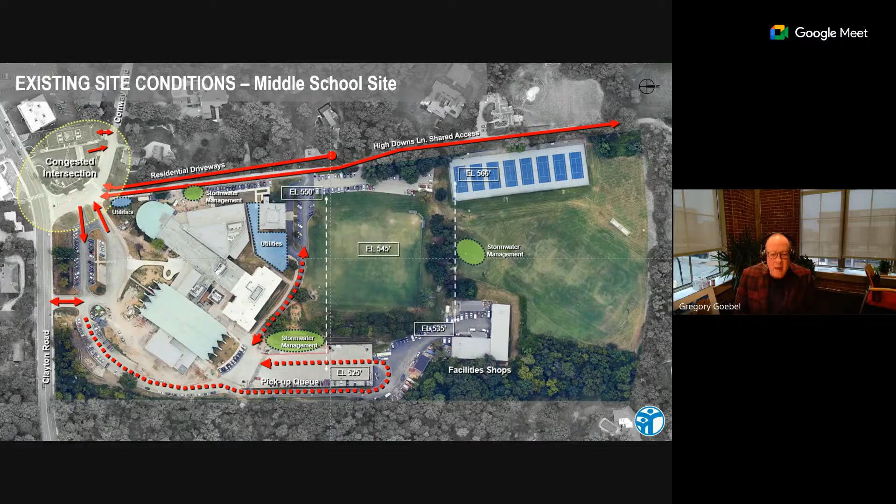So initially we had looked at different options about how to proceed, and had come to the conclusion as a group that for a number of reasons, the A site was likely the right place to start. You always assume that not building a fresh new building is going to be one of the less expensive ways of doing it, and I think that was partly the cause for assuming that was the right place to go. By the way, in this process, costs have been driving choices. We've been looking closely at what we anticipate the cost being, and it's not unusual at this point for numbers to be a little high because we're conservative in the way we look at things. The last thing we want to have happen is to tell you everything's good and then find out you're $3 or $4 million over budget. So we're going to deliberately inflate the costs a little bit just to make sure we've covered ourselves for any eventuality. Slide please.

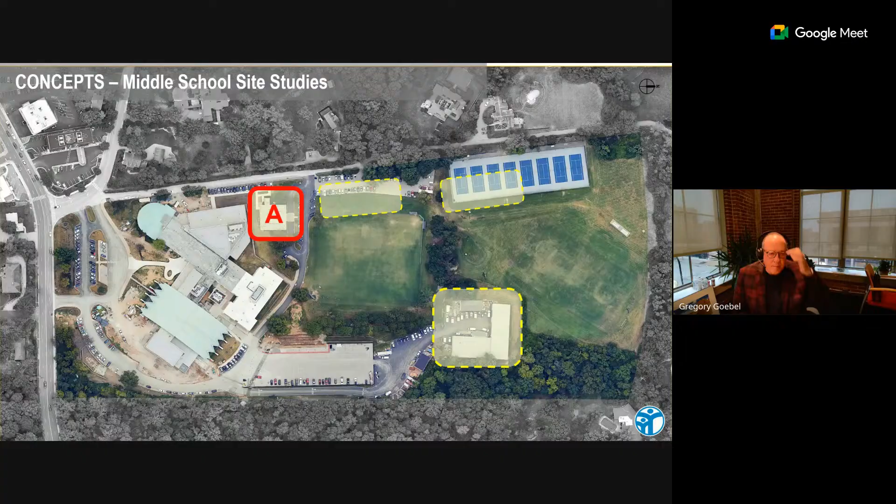So I'm going to let Erin speak to this because there are a number of viable options for how to proceed. And then we found a new one that we think is a revisitation of something we had spoken about in the past, but I think it makes sense for us to reconsider at this point. Next slide please.

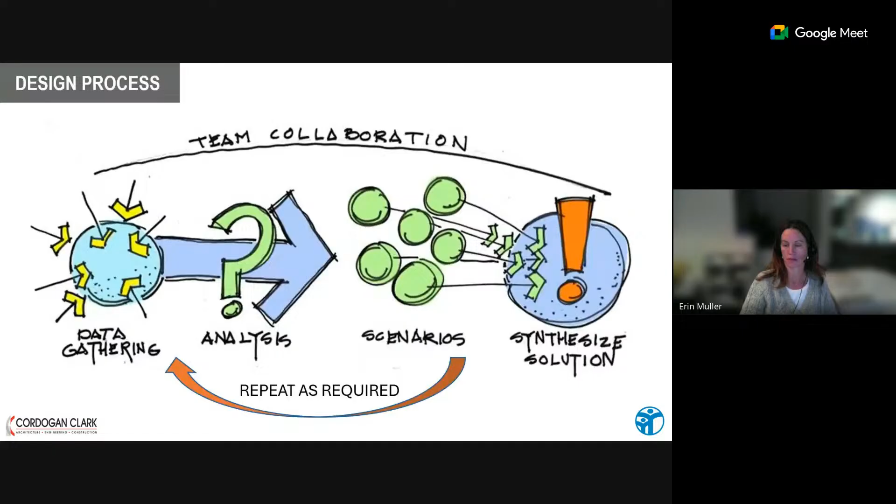It's a little slow. Just as a reminder before I hand it off to her for the time being, this is what we had shared with you long ago - this is a process that, if you remember the shampoo commercials, it's rinse, lather, and repeat, or you know what I mean. In this case, it's data gathering, analysis, scenarios, and then synthesize a solution. But the lower part I was speaking to a second ago, it's repeat as required.

So we've learned some new things. We know that we need to gear shift a little bit to make things align in the way we want, and that's what we're doing. So this is all a normal part of the process.

And I'd like to restate what Dr. Macy said, that we are not expecting a solution or an answer from you today on direction. We're talking to you about things that you have to consider. And by the way, we figured out a way to let the schedule slide a little bit and still keep you on track. It actually may work better for you because it gets you out of a bidding timeline that would have you competing with a bunch of other people for the same contractors.

We delayed just a little bit. We'll sidestep that issue, and you'll likely get better numbers as a result.

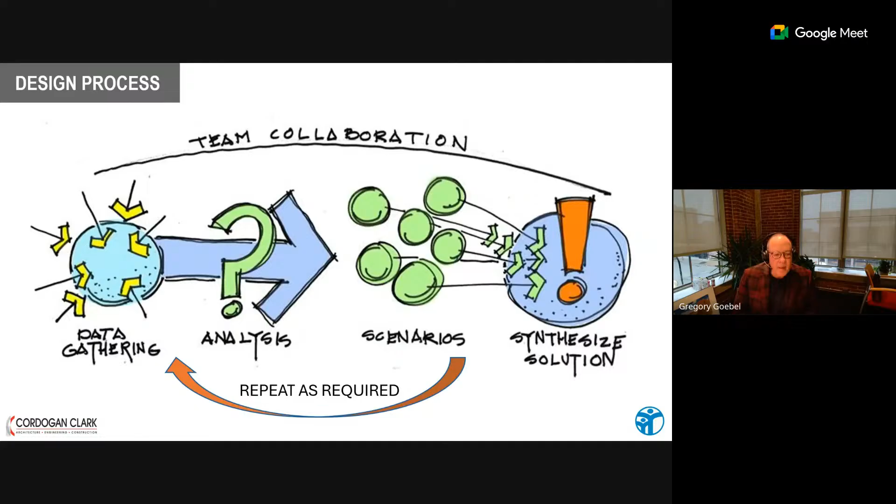So next slide, please. Let me go into the A. Here we go. I'm going to back up a little bit to the agenda and talk a little bit. And good morning again for those of you who, when I first joined, have now joined.

So as Greg mentioned, and as we all know, the consensus was to really look at option A on the middle school site and how that could be repositioned for a new administration. So we honed in and looked at the site in four different ways. We looked at what we're calling A1, which is renovating the existing building, an addition, plus a connection to the new addition of the administration building to the existing middle school. So you have that bridge if and when it's needed.

Option A1 and A2 are the same in what we're doing to the site. The only difference is A1, you would remain in the existing administration building during construction, and A2 would be to find and lease temporary office space during the construction.

So as we went down that path, there were some challenges, and we wanted to make sure we were testing all options. So we developed A3, which is demolishing the existing building in its entirety and providing new construction on the same site, still with the connection. The temporary office space was proving to be a little more cost effective because the length of construction was greatly reduced.

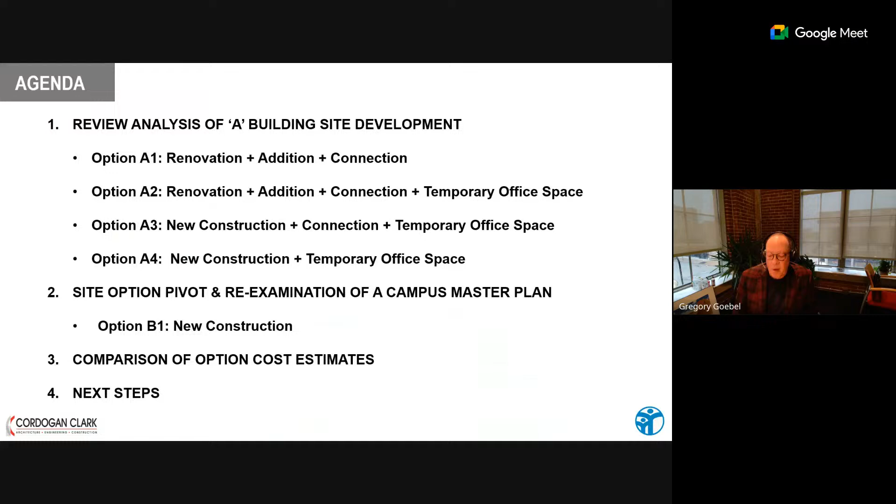We're going to completely revisit all those choices when you make a decision about which direction to go. If we have to do a couple of them so you can compare and contrast, we're happy to do that as well. And to the point, this is pre-design, and what we have named all of this is

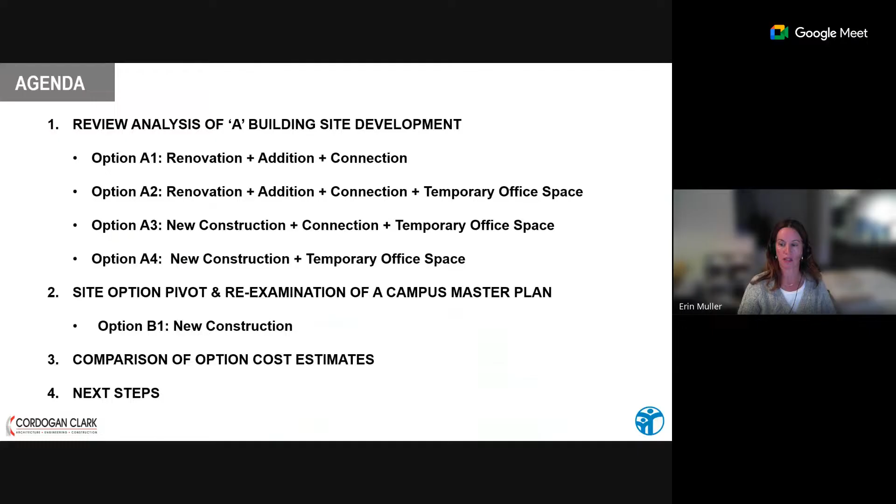test fit, massing study. We don't consider this design. We'll get into the design of the actual building and interior layout during what our phase calls schematic design. Right now, we're testing the site to determine does this fit, what square footage does this space take up, and if it fits on the site in the magnitude we're showing it, what's the constructability level of this building on the site per the placement. And that is really the cost estimates, and you'll see the changes between the two.

So going to our A1 and A2 sites, looking at that A site in detail. This is taking the existing building and adding an addition. So we went back to the program and looked at that approximately 26,000 square feet, but then we lowered it just slightly, knowing that there might be some things shifting here and there that aren't determined. And then adding a connection back to the middle school.

So this dark gray box is the existing middle school, and this dark gray box is the existing administration. Where we're calling out a secondary entry is your current main entry, and we're moving the main entry to the new building in a different location. We're anticipating being able to fit the square footage within the space between the existing admin and the middle school. That would be about a 1.5 story addition with a 2-story portion in the middle, with a small connection on that lower story to the middle school.

So this is the site that we looked at, and this is about the geometry that we played with. It's worth noting in this site plan that we've started to develop a courtyard here, which is very nice, but also very challenging to construct — to get crews back there, and the machinery needed to construct the second half of the building. If north is to my right, this would be the south side of the building. We have that retaining wall because the grade changes greatly between the middle school courtyard and the upper administration level, as we're all aware. So this building was posing some challenges from the get-go with site constraints.

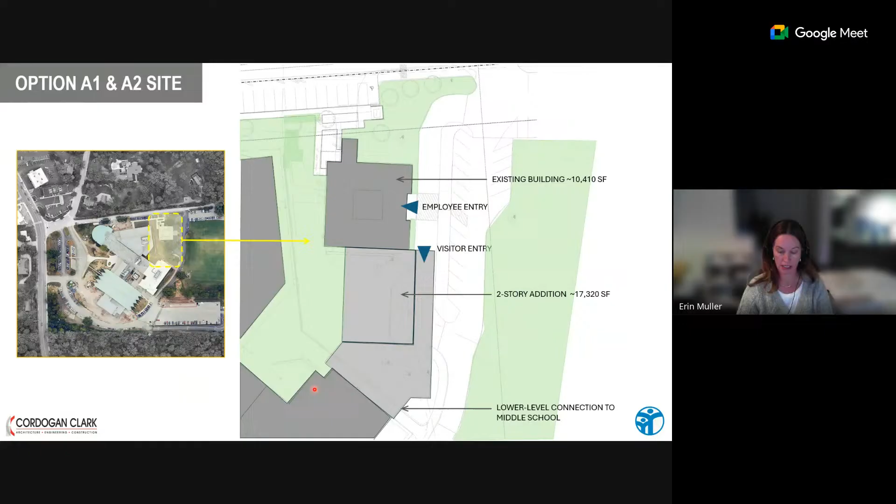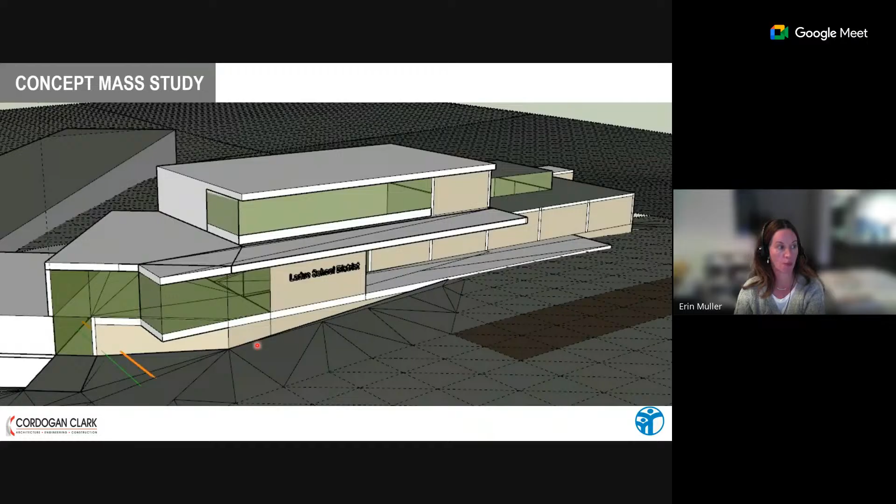Again, concept mass study — what could this look like? Taking the existing building and adding on to that with a geometry, and floor-to-floor levels that made sense, but still able to give more height to the addition piece than you're experiencing today in your current building. And then at what point do we have to drop down to make that connection to the middle school, and how big of a square footage could we give to that interior? By the way, this strategy you see represented here is consistent with how the building was added onto in the last round.

So it utilized the green glass to make the connection to the roofing elements consistent, and then used this concrete frame and masonry colors as a means of making it a campus. I think this strategy will provide you with a pretty elegant building that's consistent with the way the rest of the campus looks and acts. So we think there's a good building in there if you can afford it, but it's a pricey thing because of the connective piece.

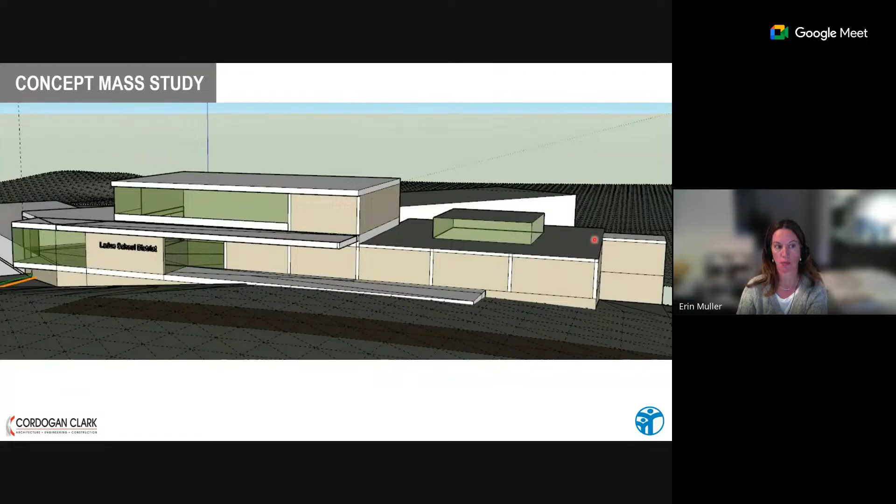Just another view, more focused on the existing. In our pricing options, we've asked our estimators to price removing the portion of the roof above the current boardroom and creating a 4-sided clerestory to bring natural light more into the middle of the space, and could actually get down to the lower level in that means as well. There are a number of options about how to use the daylight to make sure the original piece is as good as the new construction.

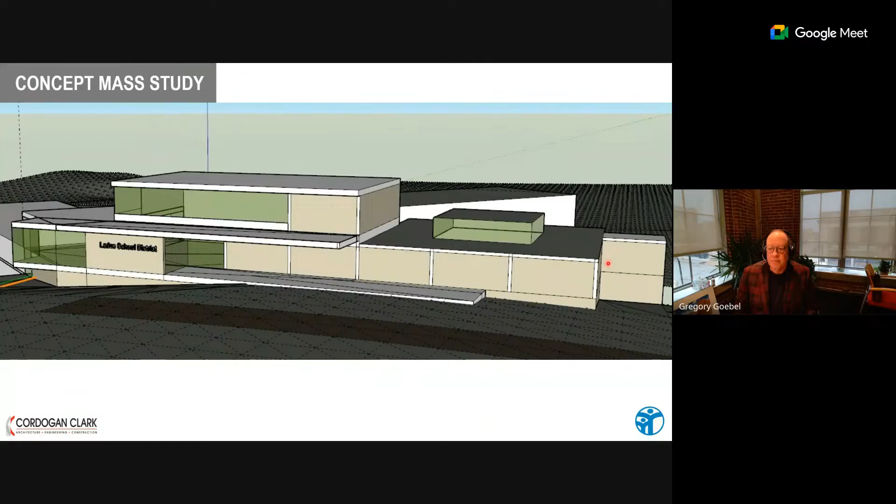So I'm going to jump to our test fits. Again, this isn't our space plan — that's more of a design where we'll start to see the ins and outs. This is to develop adjacencies and to make sure that the entire program fits at the size that we programmed.

It was in that Excel document that was shared in the last board meeting. So to familiarize yourselves, this line is our existing building, our new addition, and then we'll have the roof below of the middle school. This is grade level, so we are at the level that you walk into the current administration now.

As I pointed out during the site plan, the new main entry, visitor entry, would be down here, coming into a secure vestibule, with a lot of public facing spaces right away — that boardroom, reception, some meeting areas — so people coming directly to meet and then leaving don't have to traverse through the building into the different departments.

Lots of what we're calling public facing areas, as well as more of the noisy areas — the break area, the lounge, areas for you all to gather — connecting an exterior patio to both the addition and the existing building.

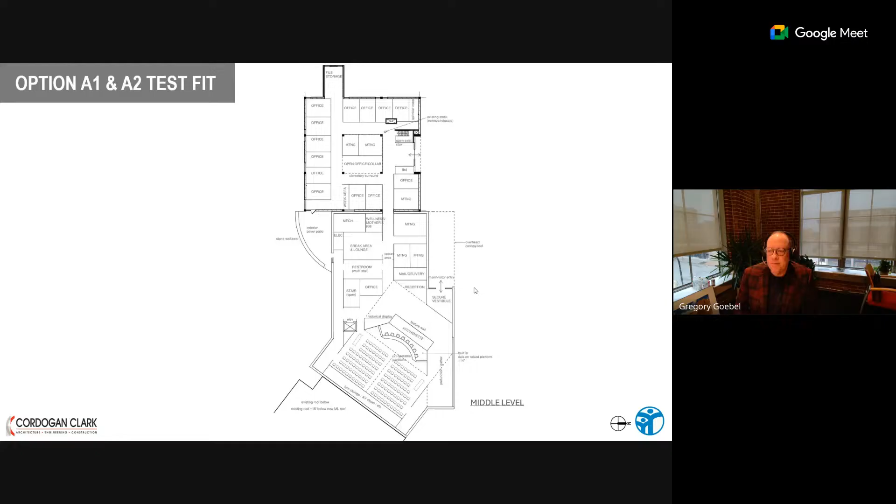Again, this is all just a starting point about how these relationships work, so don't get stuck on any of it, because we're going to reinvest in it as soon as you make a decision about what direction we're going to go. We're just making sure we're hitting the points of the program and putting that program into a visual — this is a glorified bubble diagram, if you will.

So moving upstairs, what does that look like? Taking the stairs of that new addition and coming up. And again, I'm going to zoom in.

This is an office suite. So again, we have that — it hasn't advanced yet. It's advanced on mine. Yeah, I'm still seeing the previous plan.

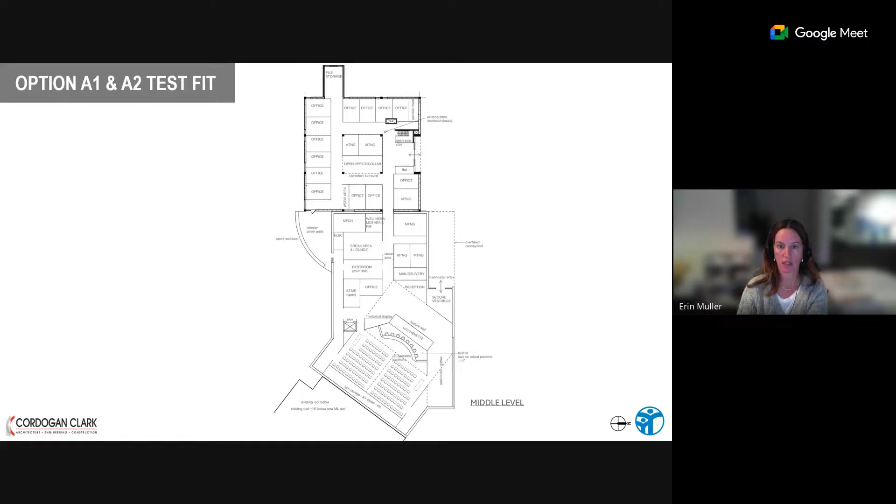Are you? Okay, well this is interesting — here we go. Let's see, this is... there it goes. Okay, I apologize, I didn't realize Google Meet kept the screen share frozen. Okay guys, so I'm going to show you this a little closer up then — I was zoomed in on my side and you guys were trying to read Sanskrit.

Okay, new existing building. That new addition that allows the public facing.

The large boardroom, again, most of our ground level where you enter would be a lot of the public facing amenities and program. Right now, I do want to point out we're showing 140 visitor seats in the boardroom for this plan, just so you guys can get a sense of scale and how large that boardroom would be in comparison to the rest of the space.

All right, now let's go upstairs. So this is more of a private office suite — again, envision some glass walls with lockable doors.

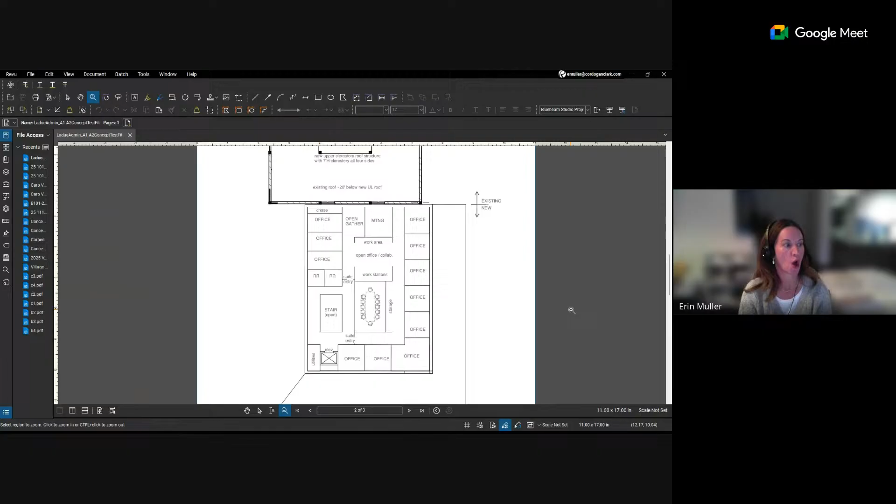So evenings and weekends, the general public, if they do wind up the stairs, they are constrained in this lobby area. But behind here is where there's offices, meeting rooms, open collab areas, and work areas — keeping those departments intact in place is how we got our office counts on the different levels.

Now I'm jumping down to the lower level — this is the lower level of your existing building. In this scheme, we do have the ability to maintain the print area where it is and give it a little bit more elbow room, keeping the mechanical room where it is, which is replacing what's needed in terms of the units and the lines.

Most of the lower level we envision in this option could be used for closed and open storage for various departments to share, whether it's records, supplies, paper, etc. We know you guys have a lot of storage needs.

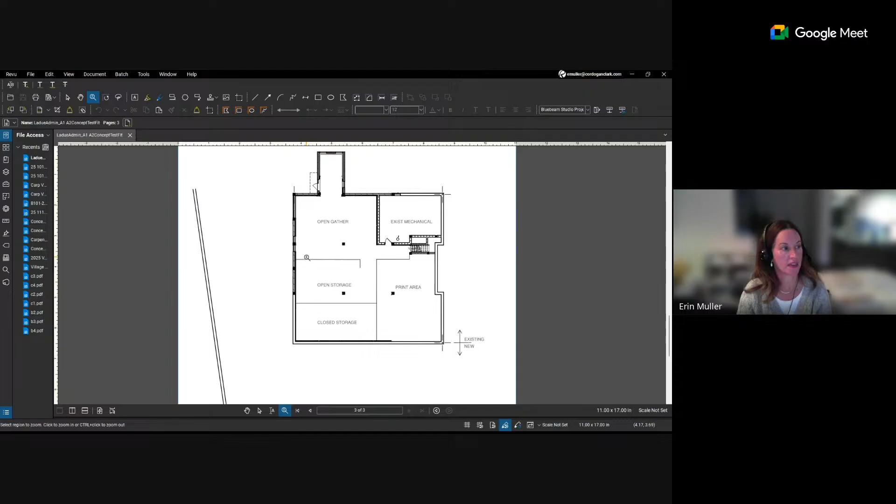And then the area that does have access to grade and some nice natural light, this could become an open gather area. By open gather, it could be an all-call conferencing area with a large screen and tables, or it could be an area for training. It could be used in a myriad of ways, but this is a nice space. We didn't want to put it in with the storage areas.

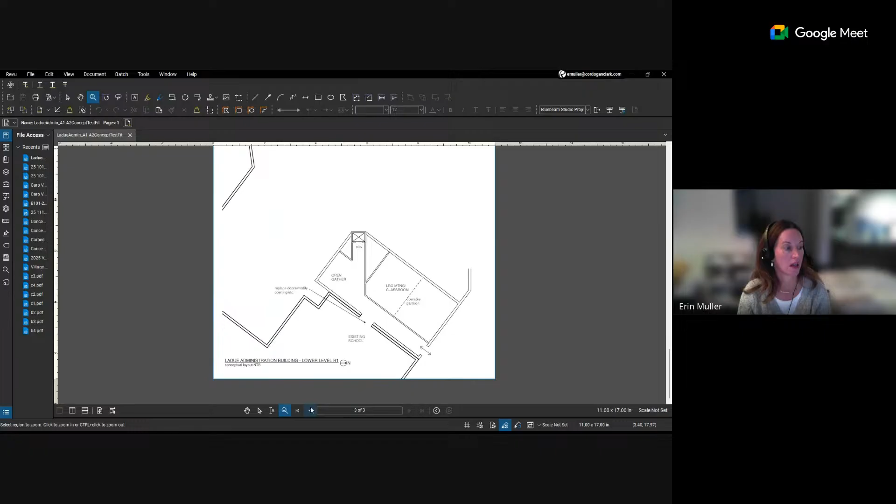Now looking at that connection piece, this was something we didn't really program or talk to anyone about yet. So if an option on this A site with the connection is desirable, we would like to have more discussions. But in order to simplify the footprint and maintain a reasonable budget, as well as make some large scale swag guesses, the plan is to open that exterior entry and create a new egress out, with meeting areas, whether it's a classroom or a large meeting that could be separated into smaller meetings, an open gather area, and then access to vertical circulation via an elevator that would take you up into the main floor of the public area of the new addition.

I'm assuming what's showing is still the... it hasn't changed yet. I'm learning.

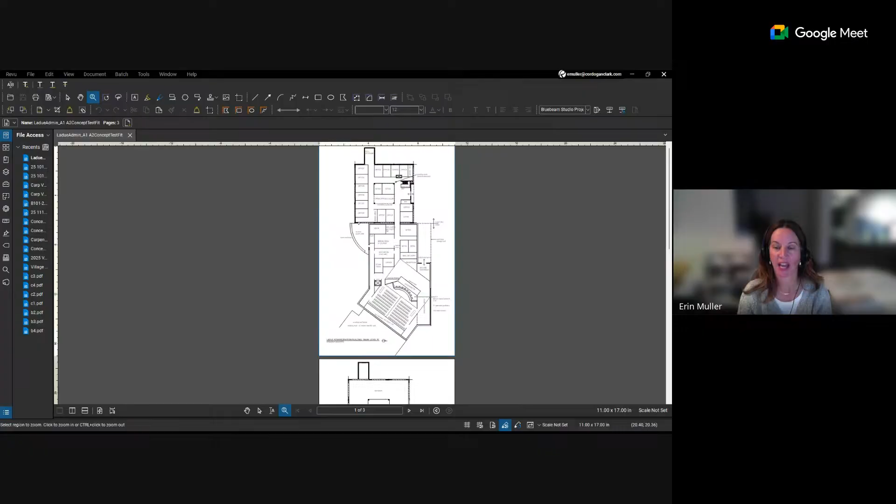Okay, so now I'm sure you guys are all wondering, what is the site comparison or cost comparison? But I do want to mention, A3 is that one site where we did new construction throughout with the connection. The test fit we did was very similar in scale and same square footage. We didn't give a planned test fit. We took the program and what we learned from the addition piece, and what we needed to put into the new construction if the existing building came down, and that's how we priced it.

A4, what you'll see is all new construction, but we did take the square footage and reduce it to see what that does to the overall price.

Erin, there are no numbers on the screen yet. Right, Rick's about to share. Okay, I'm gonna stop and he's gonna share his. Okay, give me a second. Do I need to do a window? Let me see here, do this. And that, share screen window. Okay, here, I do this.

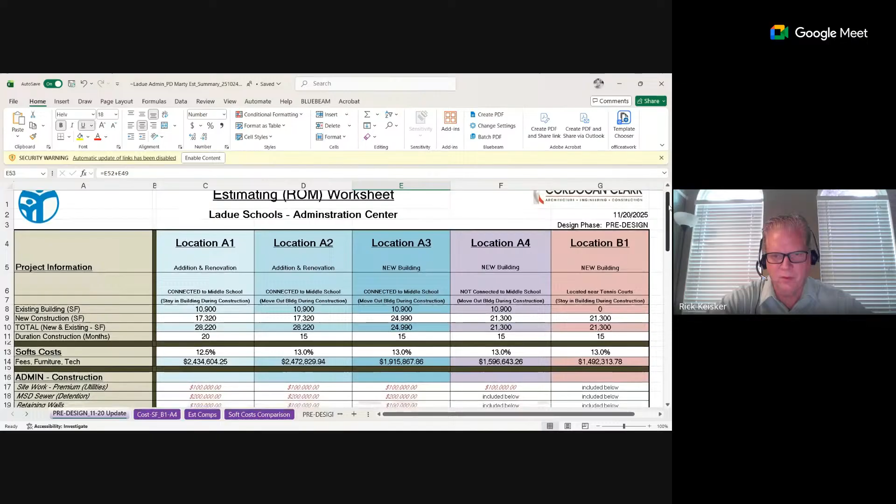Are you seeing the Excel sheet? Okay, so this sheet I'm going to show you is similar to the one we did before. And like Erin discussed, we have all the options. We added the A4 and B1, and we eliminated option C that we had before. So one thing I'll say is that this is all very preliminary. At this stage we don't have anything drawn, we have boxes and things like that.

A lot of our cost data is based on reference projects and cost per square foot, but we are putting several sets of eyes on this. We're looking at this internally with our architectural team, we have a construction team in our Aurora office that is a resource, and we have a third-party estimator. So everybody's looking at this, and we're really testing and spending a lot of time working on what we think the numbers should be based on the kind of limited information we have at this point.

One thing I want to point out as we go through this: you'll notice the cost for options A1 and 2 went up, and like Erin was talking about, part of that is because the square footage went up. Basically, as you saw in the diagrams, we're connecting 2 points, connecting 2 buildings, both in plan and elevation, and adding square footage to make that connection and circulation to get to the middle school. So that's added space that wasn't in the program for the administration building, and it's kind of inefficient because we're trying to connect 2 dots rather than just building something out freely without those connection points.

So in the previous estimates we had kind of 2 options: one that showed a 26,000 square foot building, and another option at 21,000. Now that we've actually laid out something, options A1 and A2 show the total square footage is higher, about 28,000. The A3 option, which would be a new building but still connecting to the middle school, has that added connective piece tracking at almost 25,000. And then the A4 and B1 options we're going to show you are down to the minimal program, since it's just the admin building with no connections, which is really the most efficient way to get your square footage where it needs to be.

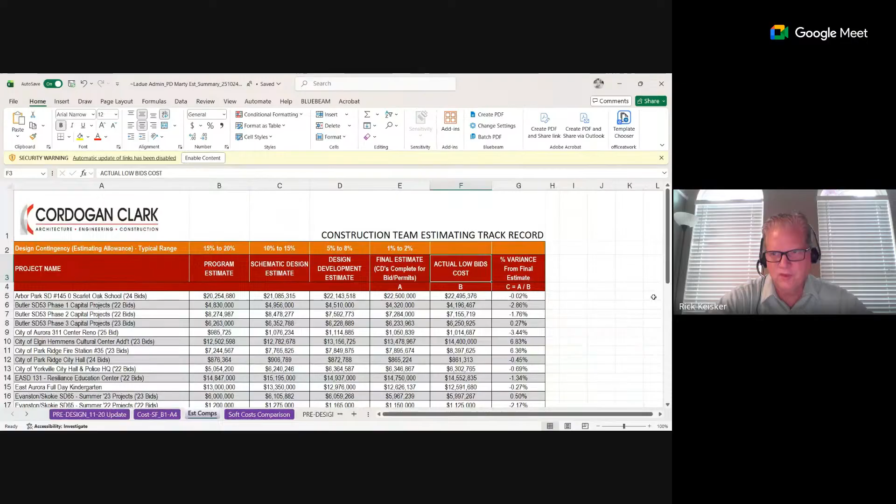We hold a number to account for unknowns. I'm going to show you this sheet, which shows some historical track record with our in-house estimators on estimating we've done from programming, kind of like we are now, through schematic design, design development, until final bids.

What we're trying to do is keep this consistent. For any of you involved with Prop L, it was a little challenging in design in that we had a cost increase at each design phase, and then a VE and redesign, which is very disruptive to the design phase. It slows things down, causes problems, and makes you think you're going to get something that later we have to tell you you're not going to get.

So we hold these design contingencies, and I'm showing here that it's 15 to 20%. We have it at 12 right now on your building at this stage, but as we go forward we'd drop that number down because there's more information drawn in each phase and the estimates are getting more accurate, with less unknown. We haven't done that yet, we're waiting for the survey to come in, we don't have that at this point.

We'll eventually be getting geotech information once we know where the building's going, and those sorts of things. As we go through the process, we design more, we have more information. Once we get through governing approvals with the city and those sorts of things, the design is more solid, our estimates are more accurate, and we can start to reduce it.

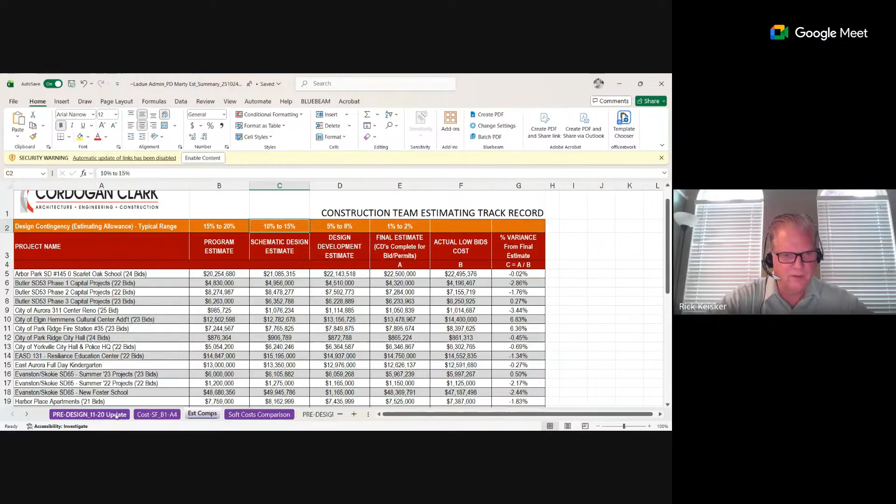Our goal would be, as we work through this process, whatever the option is and whatever the budget is, we're working hard to keep it at that same budget as we move forward. I just wanted to share that with you. Before we move back to the design, does anyone have any questions about the estimating stuff we're showing you?

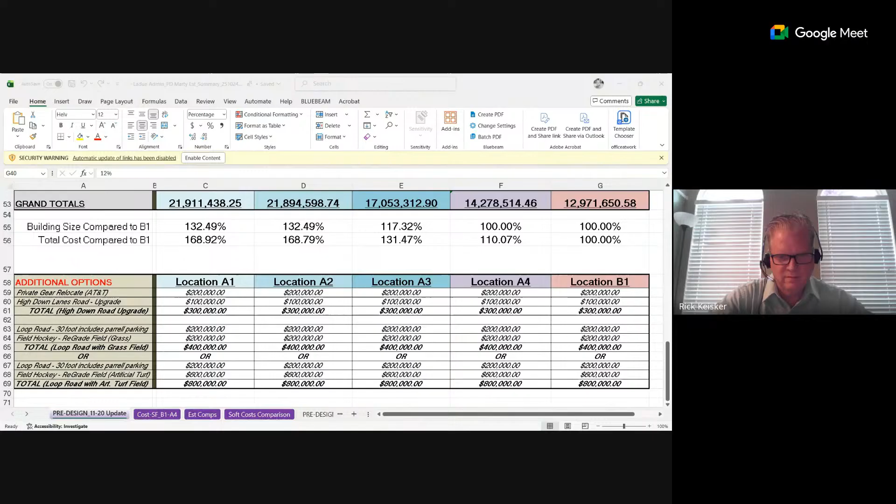Okay, I guess then, Erin, if you want to take the screen back. I'll see if I can — I don't know if I have to stop sharing or if you just... Yeah, I can override you. Okay.

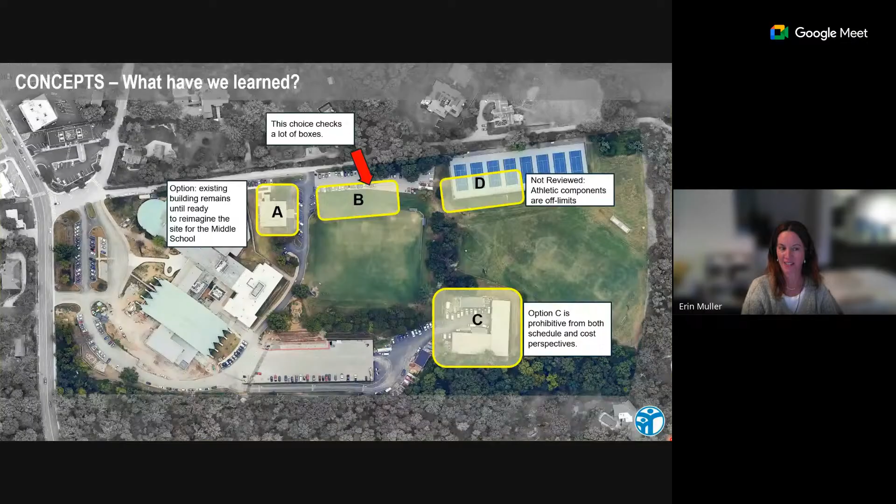As Rick mentioned, we're going to talk about what we discussed at the beginning, our reflecting on option A. As viable as it could be, we wanted to understand: is this the best solution for this building at this time? So what have we learned?

We went back to all 4 sites and did a quick evaluation again. Option D we continued to rule out because athletic components are off limits. Option C would be an even higher cost estimate and a longer construction schedule, so we didn't dive into that. That left option B. As we looked at B more stringently and understood there was the availability to build a building and keep the athletic fields, it became a pretty viable solution.

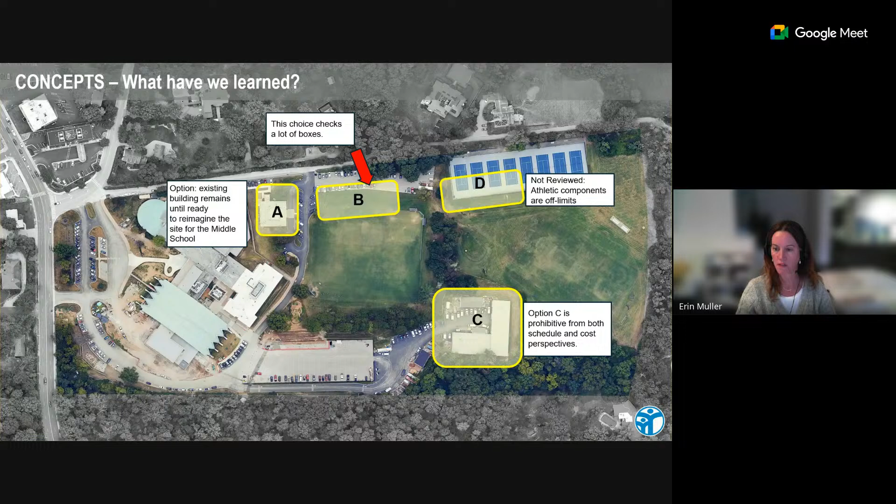So what does the option of building over here provide? It eliminates the need to move off site for the administration staff during construction, so it's cost effective in that realm as well as a little bit more safe.

It does not impact the athletic fields here. It reduces that challenge of constructing between two existing buildings on a steep grade and moving that fiber line that currently runs between the building down to the facilities department.

It allows for more option-filled future additions, meaning if we were to build here, and that's still an option, but that does constrain what happens to the connection and this building in the future.

It becomes one of the more cost-effective options with the current budget, and it maintains this existing building until a little bit more time has gone through and maybe some things become more aware of how to utilize this A site to be more beneficial for the district as a whole.

It also allows them to postpone doing the demolition work and the mitigation stuff as well. So if you're struggling to keep the number lower for whatever reason, then you can sidestep that issue, and that's a significant number of dollars that you'll save in the short term.

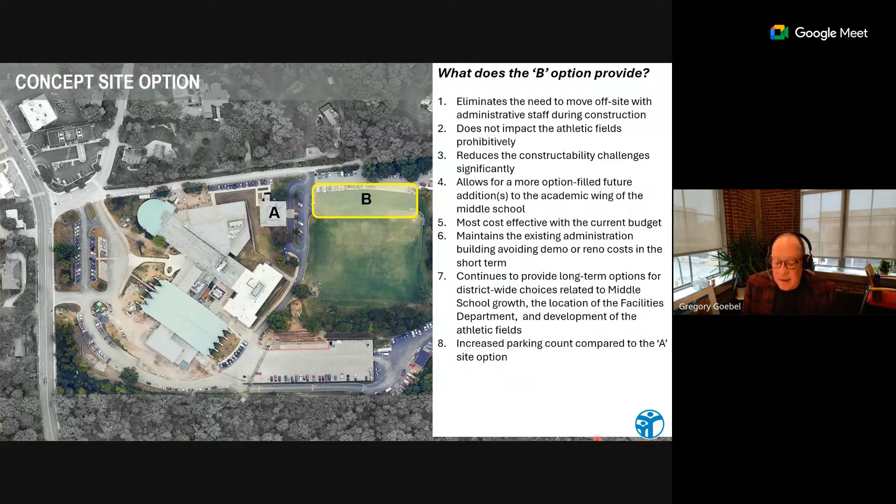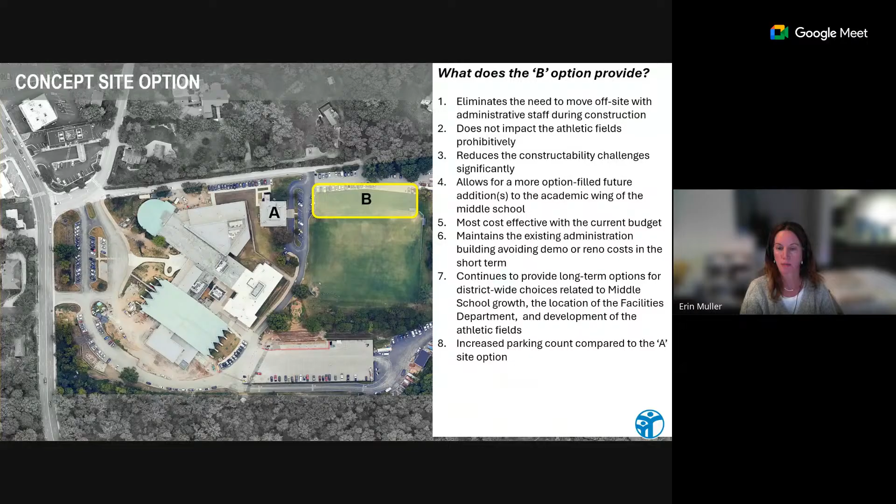And it also allows the print shop to remain as is in the short term too, without the need to spend money to relocate it to facilities or elsewhere. So we're looking at this site because it provides these long-term options, and it also increases the parking count compared to option A.

It doesn't prohibit the ability to redevelop and relocate facilities if that's a decision that's made in the future. And it still gives this option to be able to renovate, remove, remodel, attach, not attach, and have some program in some fashion at the A site.

So looking at the B site, what could we do with this? What does that mean? So working with the existing grades, we're going to use that to our benefit instead of as a challenge. It was more challenging on the A site to utilize the grades because, as Rick mentioned, we're connecting to two different points at two different buildings.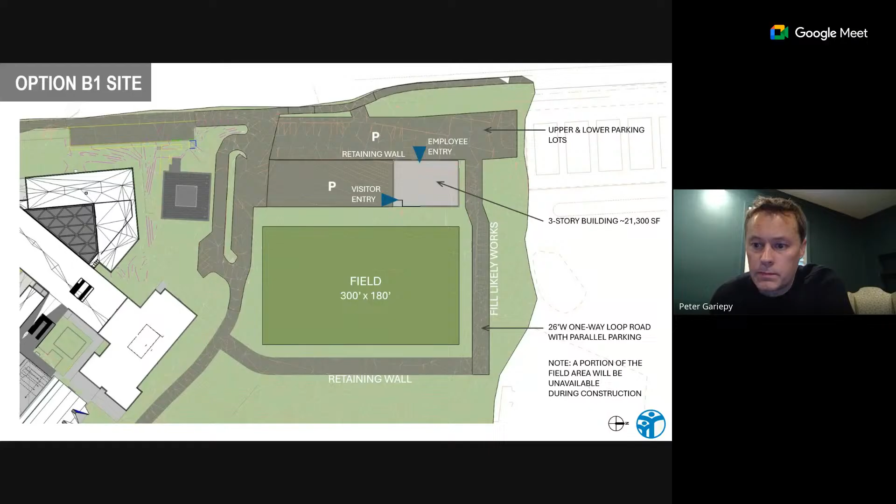That's a good question, Peter. What we've heard from the middle school is that space is used significantly by their physical education program, so we have students out there during the day. It does provide a fenced-in area for them to do all kinds of different activities, so our original intent was to try to preserve that as student space.

But again, long-term planning and what we're going through here is not necessarily tied to the immediacy of the admin center. So it's certainly in an area that we can work with the middle school on and keep an eye on.

Okay, thank you. I just remember Mike Noonan telling us that, I think because of maybe the elevation issues over there, there's quite a bit of regular maintenance to fill in cracks and resurface, and I didn't know if this opened up some options.

Peter, just to reassure everybody, we looked pretty closely at the parking numbers. We can significantly increase the parking count with the scheme you see in front of you. And if later on you decide you want to bite a couple of courts off in order to put more up there, that can happen as well.

Okay, all right. Thank you, Greg. I appreciate that you guys included that in the analysis.

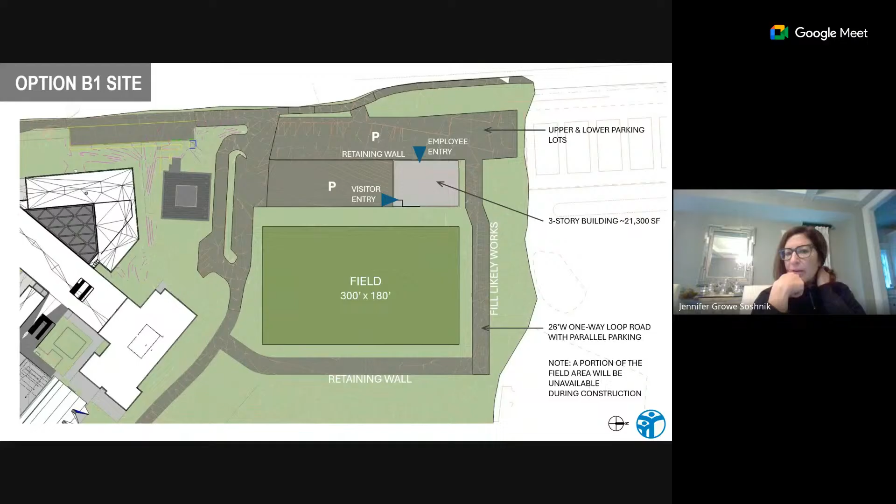This area is more of the master plan long-term, but just in terms of this first field, what you see on this current screen is what we priced in our cost estimate. The loop road is something Rick broke out separately in his number, so you could sidestep that in the short term if you're really trying to hold your numbers down.

So there's a lot of flexibility built in. By the way, the loop road is drawn as one-way traffic, but it's wide enough for two lanes, meaning you can use it for parallel parking over its length. So when you have an evening or weekend event and people need to get to the fields back there, there are places for them to park conveniently, closer to the field.

Also, we're showing that 3-story option at the lower square footage of 21.3, and we'll see a test fit in a minute of how the program fits within this space, being more efficient without having to work with existing conditions. What I also want to point out is that this gives an additional lower parking lot on the other side of the retaining wall, where it splits.

All told, we haven't laid out fire truck turnaround and all the things, but between the upper parking lot and lower parking lot, we'll have a total of 90 to 100 parking spots. And there's still some flexibility built into that.

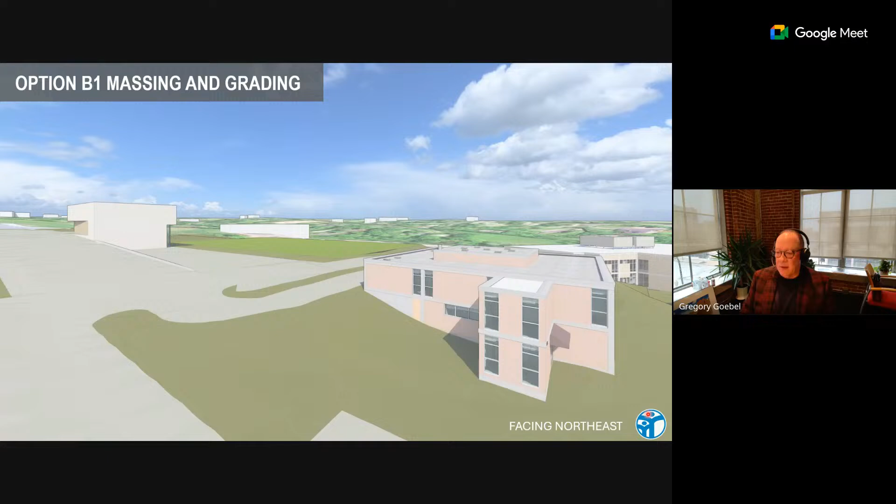Just to interject for a second, don't be concerned about the expanse of that building - it has no windows or anything on it. That's just a massing model to tell you how it sits on the site. That will be an open and inviting thing that you see when you drive up to it.

How does it work out internally? Do we fit all of the functions that are absolutely necessary? That's a yes. Do we have some amenities still that have been asked for? That's a yes. And how does it lay out in terms of public versus private?

So coming in, this would be that lower parking lot level, directly south of the building, coming in to a secure vestibule.

One thing that was asked was, can this building in the short term be utilized for athletic restrooms, evenings and weekends? Could the building remain closed and locked to the general public, but the students and visitors still have access to restrooms?

So we are showing that as a capability of having a doorway to a multi-stall restroom directly off your secure vestibule that you could leave open during evenings and weekends, while this barrier and this barrier remain locked and closed. So those students do have access to facilities, water fountain, all the things that they need directly from the fields. Erin and I talked about this yesterday.

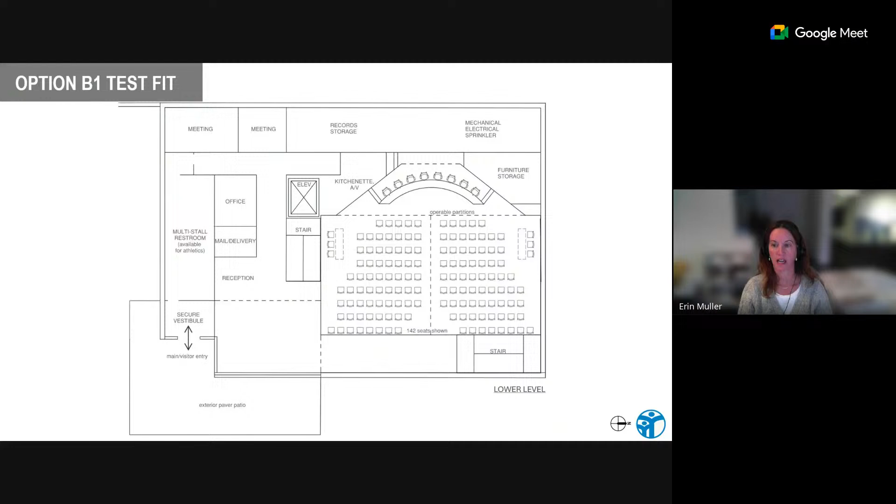And then upstairs on the third level, similar to the last scheme, this becomes more of the private office suites. There will be some meeting rooms, but again more office-private, not public-private areas that are needed. But we get our office count, we get a nice meeting room count, we get the open office—we get the things that are needed in this square footage.

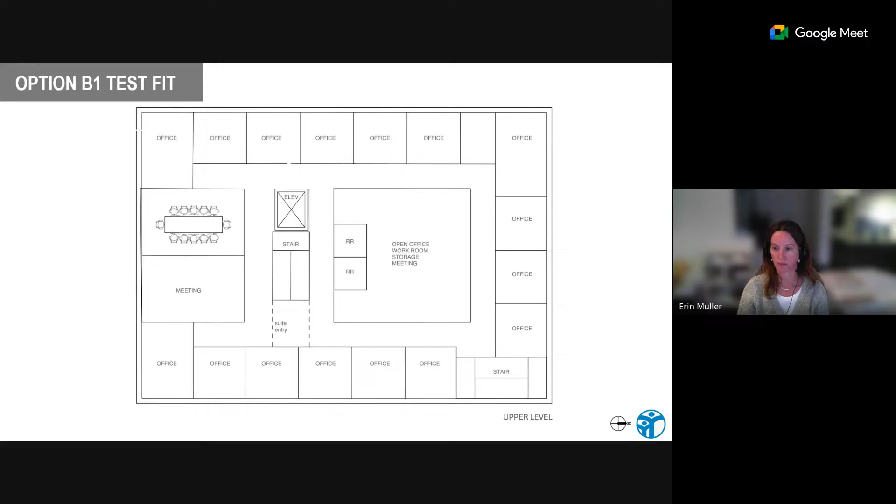And then I didn't know if you guys wanted to look at that cost estimate again, now that you've seen B1 in its entirety, and compare all of that.

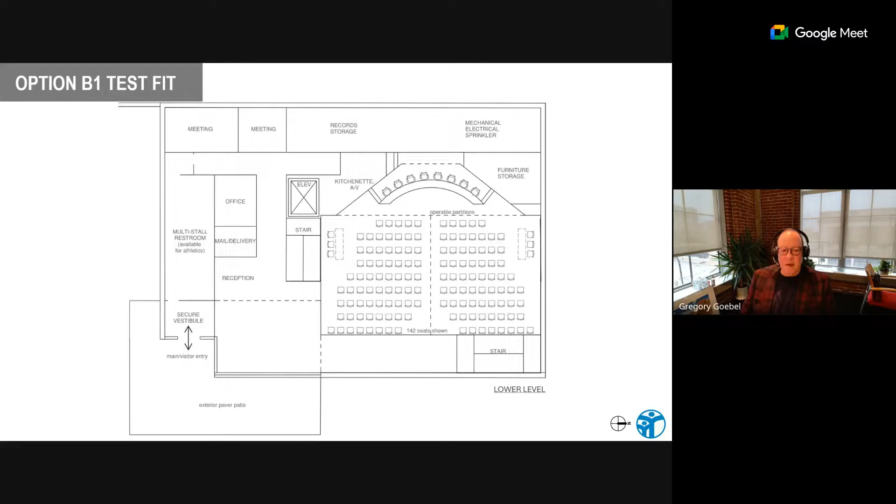Can you go back to the site models that you built? Because I think it looks understated, but it really has the potential to be a pretty elegant building.

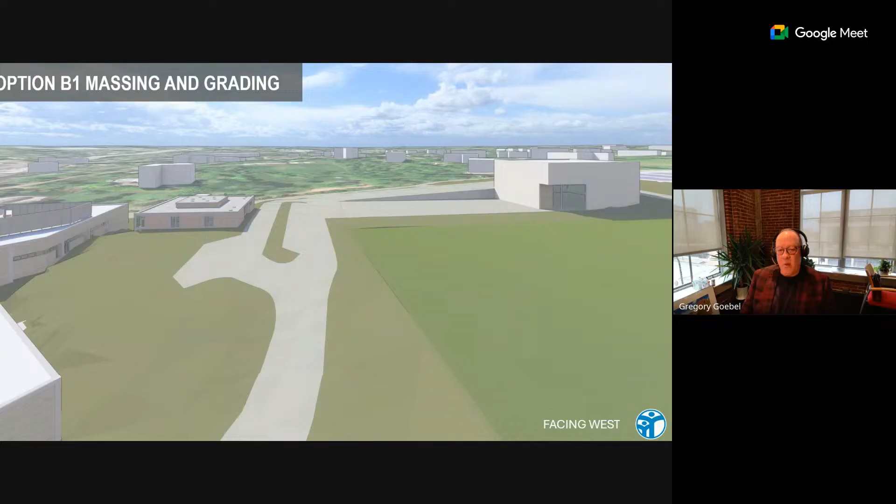So I think when that gets developed—like I said, it's not designed yet, it's just a placeholder for now—it may not be quite square, it may be a little more rectangular. There's different things we can do with the geometry to make some of the things we're talking about work better. But I think it steps aside from the rest of the building, and at the end of the day, you get to think over time about what you want to do with the existing school, which is a big deal.

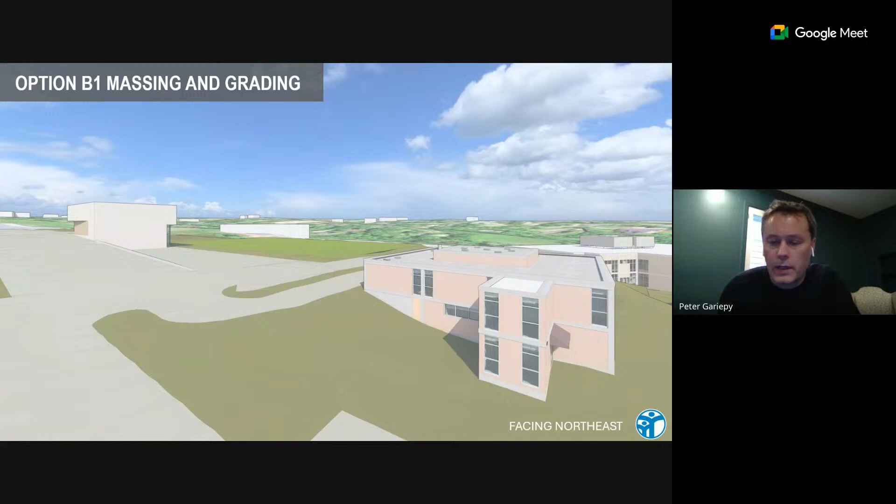That brings up another thing, and this doesn't have to be addressed now since it's more part of the master plan, but it makes me think about it because it's pretty dark out by 4 o'clock now. If there's any opportunity to have lighting on the building, or at least provide the wiring in the mechanical or electrical planning, that could shine light on the field - not stadium lights, but enough to be safe for kids and parents to finish practice, especially in these darker months. I think that's completely reasonable for us to look at.

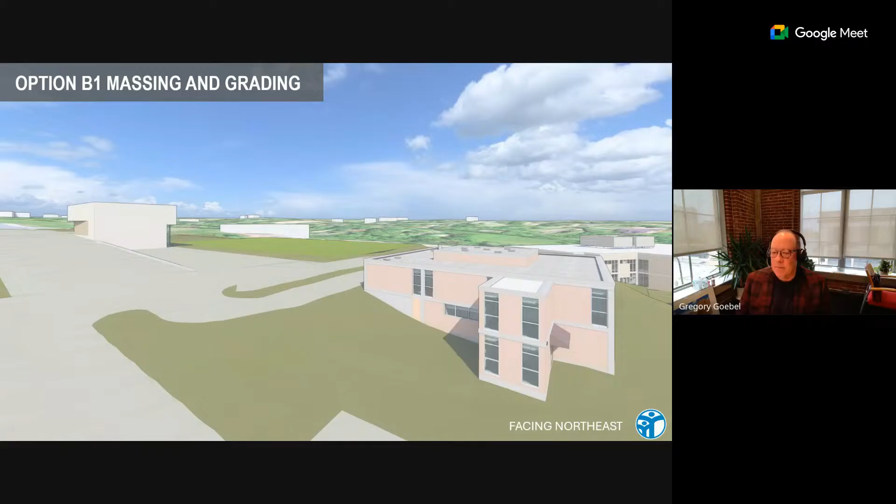The building actually will do some screening. The neighbors will not like lighting that glares at them, but if you use the building as a screen element, you can offset that some. They make fixtures these days that are really good about keeping the light down and focused on where you're designing, limiting that halo effect. We can also utilize parking lot fixtures on this lower lot that have an angled element directing light to a portion of the field too.

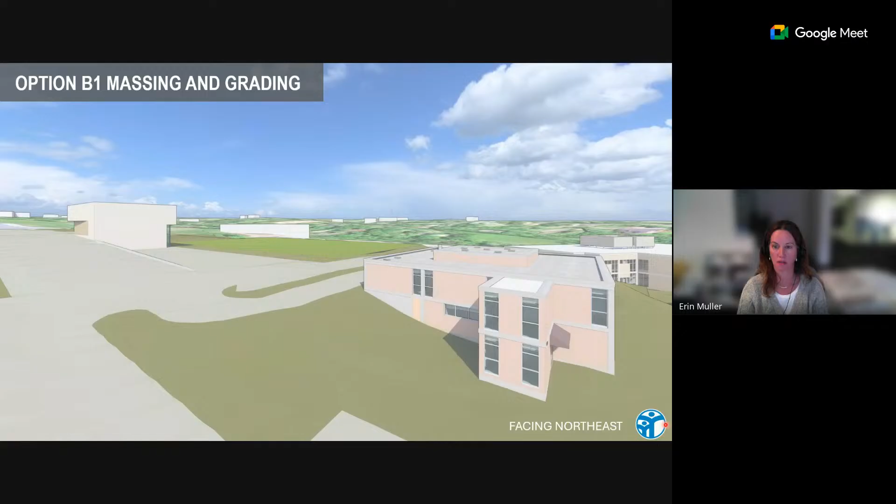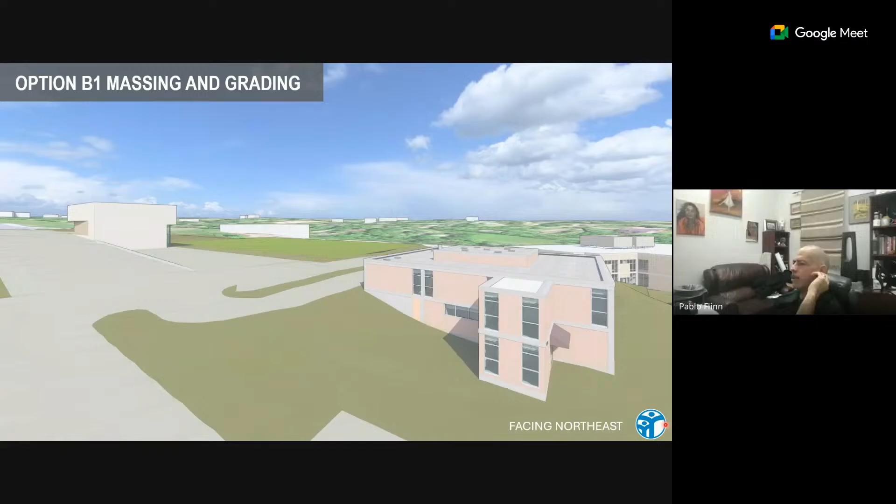Pablo, did you have a question? Peter's questions were exactly my questions around the height. Again, to Greg's point around how we can appoint that - first of all, it'd only be three stories, and the thought about how we appoint it so it blends in is great. So I appreciate the question.

Robert? You're muted, we can't hear you. You're muted. Okay, there we go.

I just had a question about the cost of maintaining the old admin center until we figure out what to do with it. It could be years before we decide whether it should be added to the middle school or become a community education center or something like that. I suspect the cost could be significant in keeping out mold and keeping it sealed and that kind of thing.

From the information we got from Mike Noonan, I think the roof on the building is newer, as are the windows. So there would be an annual maintenance cost, and that's something we could work on between us and our engineers to establish what we think an annual budget would be to maintain that. The best part about keeping it, though, is that you guys get to stay there and work in that building while the other building's being constructed safely. So your timeline is going to go down by probably almost as much as 6 months, and you're going to save a bunch of money as a result.

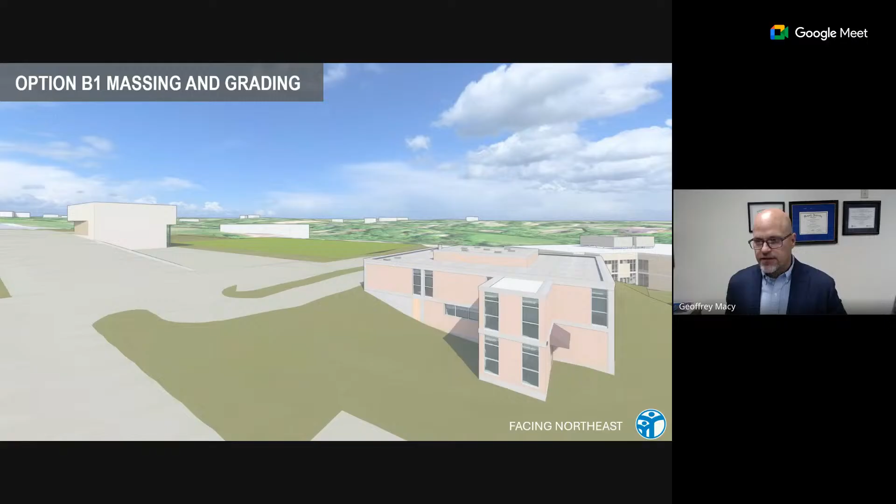Because we are not pressing for a decision or a determination, but we are at that point where in order to move on to the actual design phase, we will need to make a decision at some point if we want to proceed with the A site and/or the B site, or how we want to proceed. So we do believe that we're at a point right now where we have good information. We could continue to refine some of the estimates, but we do believe that we're in a place that we're going to need to provide direction in order to move out of the pre-design phase and into the design phase.

Jeff, I think Amy has a question.

Yeah, Amy. Just so that I can categorize or figure out where we are and all the options that we've presented, and I really appreciate all the thought that's gone into this. Way back, we had talked about an option C, which was over by where the facilities building was, doing new construction over there. As I recall, we all generally looked at it and that seemed cost prohibitive as new construction. I'm just trying to figure out, I'm going to be transparent, I like this option, but I'm just trying to figure out how we got to this option being so much more cost effective than before. Is it demolition? I'm just trying to remember how we have this seemingly miraculous solution now that involves new construction, whereas before dealing with option A location did seem more reasonable at the time that we were evaluating these three locations.

Yeah, I can jump in. So the option C option has a lot of, you have to demolish that building, and then there's the cost of relocating facilities somewhere else, that would have to happen. And also, kind of as a separate pre-project, that would have to happen before you could even build on that site. So with both options A and C, you have existing buildings and utilities and constraints, whereas once we go out more onto areas where there's no construction, no buildings, it's a little easier. There's no demolition, there's no abatement, there's not as many underground utilities, those sorts of things that come into play, and you're getting down to just building a new building. So you're saving a lot on the demolition and relocation and temporary housing—even with option A, depending on which one we do, either you're living in the building, or you have to have a temporary place to live for a year and a half or whatever it is. So that's what's helping option B become more economical than the others.

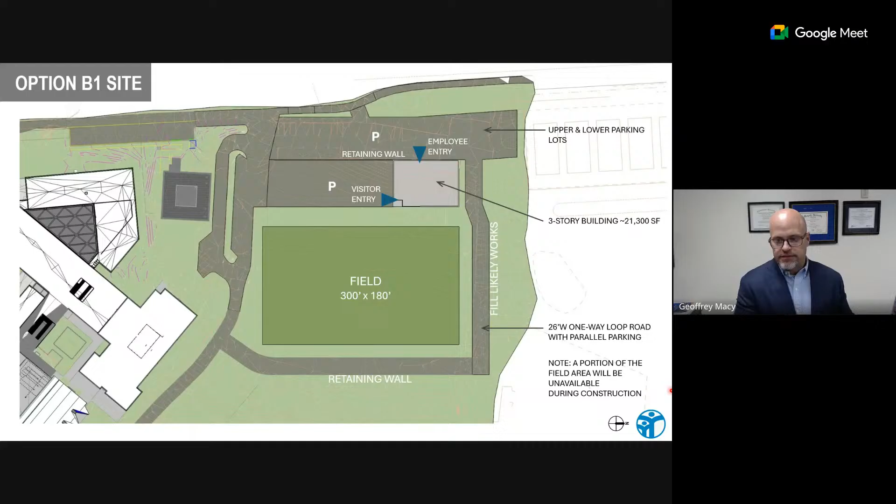Thank you. And Greg, also too, I know you mentioned timeline and where we're at in pre-design, and I know we've worked through a more extensive pre-design than we anticipated in order to manage some of the costs and come up with a cost-effective solution. So not to necessarily get into it today, because we want to honor everyone's time, but can we be prepared to talk a little bit more about what that timeline looks like today versus the start of pre-design at our meeting on Monday? Yes, we can do that.

And just to reiterate what I said earlier, you're going to move out of bidding in April perhaps to later in the summer, and that extra three months is going to take you out of that really tight bidding climate where everybody's trying to get into the ground at the same time. So you're likely to get better numbers a little later in the summer. The fact that we were more considerate and worked harder at these questions up front is going to pay dividends in that regard as well.

Is there any other questions or comments?

Jeff, I just want to chime in. This is Jim, Corrigan Clark, thank you. I think you gave a lot of information. I want to also reiterate what was already stated, that the purpose of the meeting today was so that we could hear the information, learn from it, and then at our meeting on the 24th we'll probably have some additional questions. I do appreciate your leadership, Jeff, in this, and Corrigan and Clark, thank you for all your hard work. Thank you, absolutely.

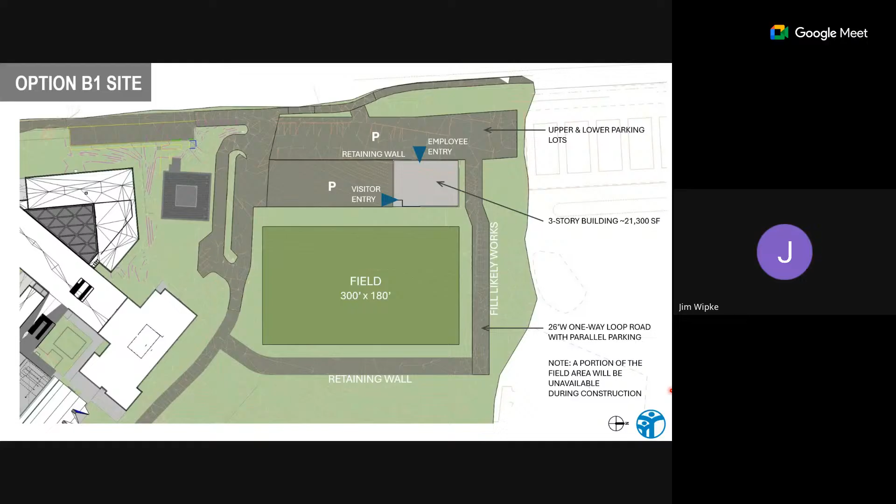Anything else before I assume this is the end of the presentation, right? Correct, yes. Okay, I don't want to cut you off. Any other questions before we adjourn?

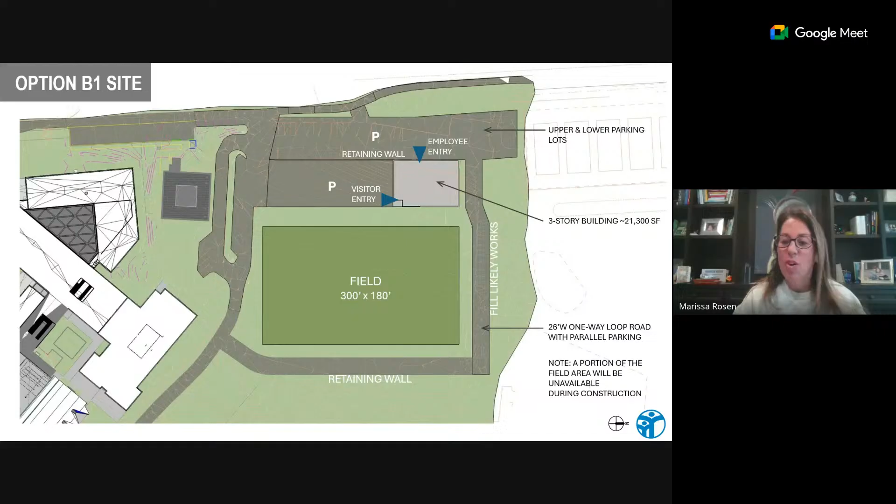I'd like one thing to comment about. You can let us know whether you want us to attend the Monday meeting or not. We can provide any materials you need to flesh out what we've got to make your discussion a full one. But if you want one or several of us to be there to support you in that conversation, we're happy to do that for you.

Yeah, Greg, I'll just speak up. I had anticipated having the team there just for the technical support, because questions are going to come up. This is a lot of information for anyone, and we've been engaged in this process for a long time, so I do anticipate a rich dialogue with questions. Happy to be there. Great, we'll look forward to it.

Sorry, I just wanted to throw one thing out, and this is not for right now, this is just for the upcoming board meeting. Robert made a really good point about the idea of it being a derelict building, the current admin center.

I know it was mentioned that the print center could stay in there, so for the upcoming board meeting, any sort of residual or temporary value we could continue to get out of the existing admin building once a new one is built, I think it would help show that it's not just going to be some sort of cost center that just sits there. Ultimately, you can demolish the building if that's what it comes down to. But I was asking, in terms of using it for the print center, what else could we get out of that building? If there's current storage in the 5th grade center taking up space, could that be moved to the admin building? Just to show this isn't going to be a useless building once a new one is built, what more could be gained from the capacity created here? I think it would be helpful to explore that a little bit.

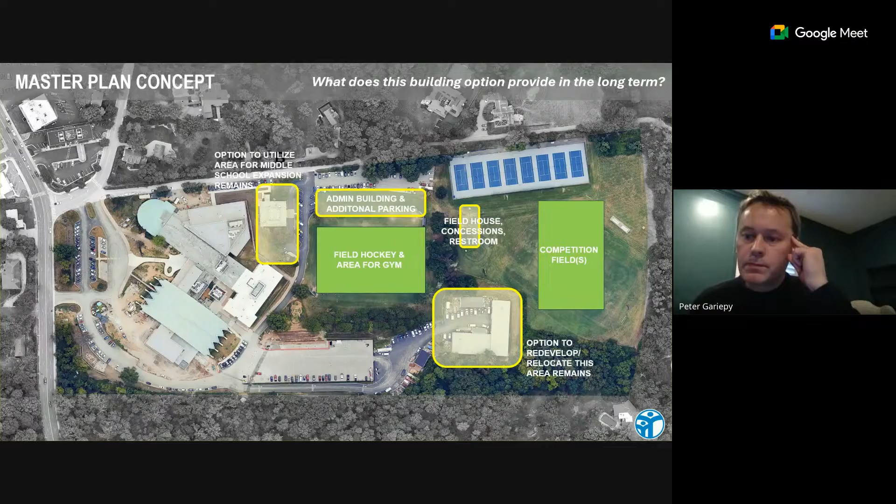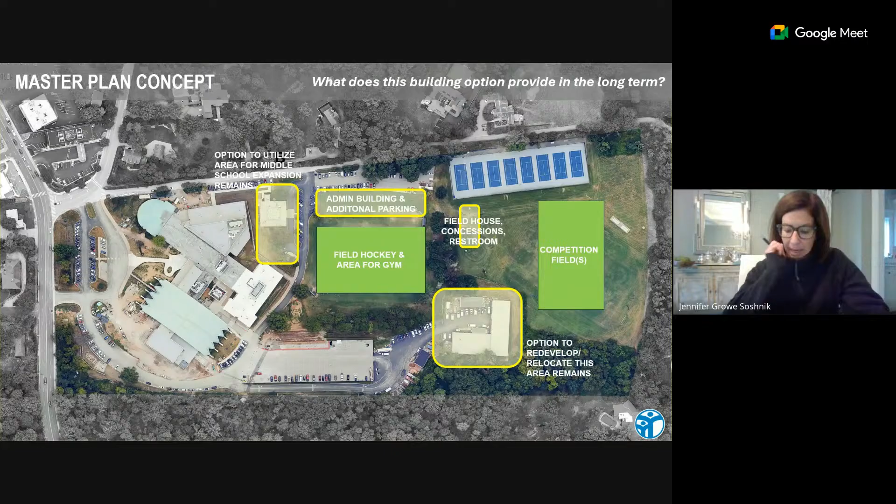Peter, I think part of the whole picture, that's probably a really good point for Jeff to include, maybe more of a district presentation in terms of that, and also a cost estimate. It'll be early and not fully detailed, but a cost estimate of just the maintenance of that building, so we can keep that in mind in terms of adding it annually to our maintenance expense.

Yeah Peter, that's a great question, and that's why we have Mike on the line. Mike and I preliminarily started discussing that, so we could certainly have some options as to what it looks like to shut off utilities, drain water lines, things of that nature, and or occupy a portion of the building, not all of it, to reduce some of the stress on the utilities. So we've already begun preliminarily working through that.

And the best part about this presentation is that master planning concept, that when we look at this site, where we started looking at an admin center, we've potentially developed some phases and opportunities that could be something we look at now, or something we look at 2-3 budget cycles down the road. So it really does expand the analysis of the entire site.

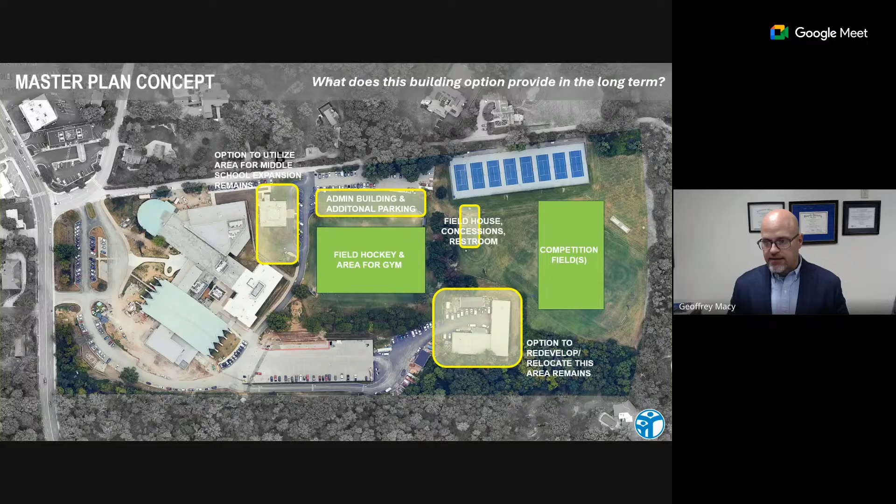Kisha: Yeah, I just wanted to make sure we've explored all the possible environmental concerns. I know we've talked about grading with the fields and things of that nature, but are there any other potential environmental issues that may arise with demolition and or new construction of the new admin center?

Yeah, well that's something we actually looked at. That's another small piece of why option A went up, is that over the past month we did get an estimate from the school district's environmental engineer, and it was a little over $200,000, which is plugged into the estimates we shared, making up the numbers. So I think we feel we've covered, at least for the A option, the cost of any abatement, environmental, demolition. We think we have that covered pretty well.

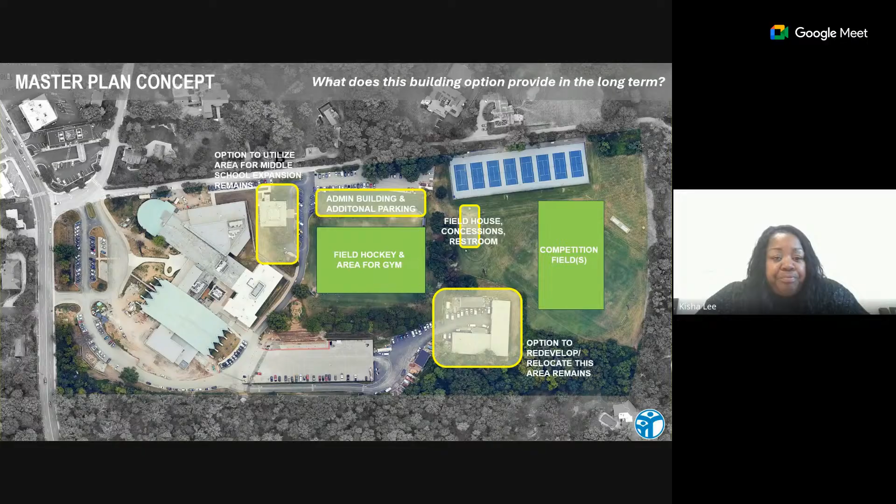Okay, are there any more questions? All questions welcome and to be answered. I just want to be respectful of everyone's time and the morning hour, since people probably have to go to work.